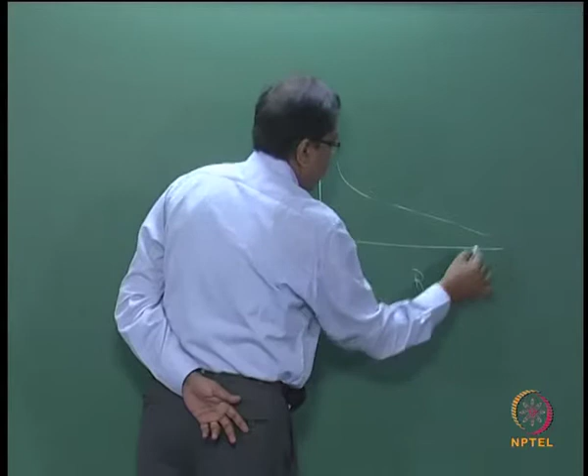Now you have already seen how the coefficient of drag varies with Reynolds number, the CD curve something like this. At low Reynolds number there is a significant decrease in the coefficient of drag, and after a certain value of Reynolds number the CD is more or less constant, the variation is not significant. Keep this in mind and try to understand the effect of turbulence.

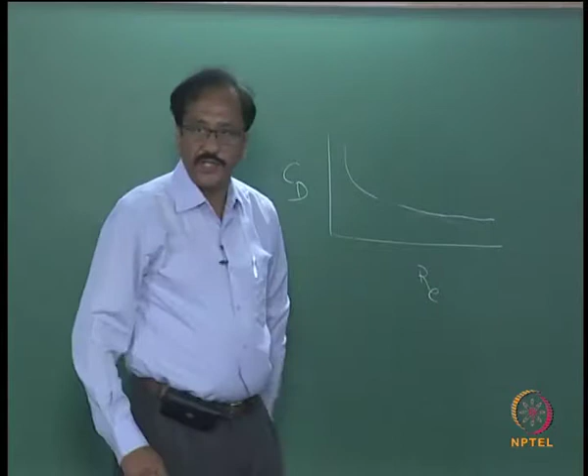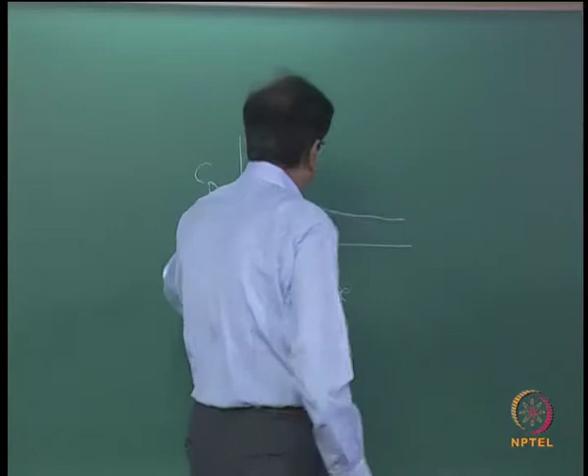The drag exerted by fluid on a body in a stream is directly proportional to the relative velocity at very small Reynolds number, where you have the variation of the coefficient of drag. So one classification is where there is a variation of CD, and the other is where there is not much variation of CD. In the first classification, the random fluctuations in the velocity will not have much effect on the mean drag, which will remain proportional to the mean velocity. After all, it is the velocity which controls.

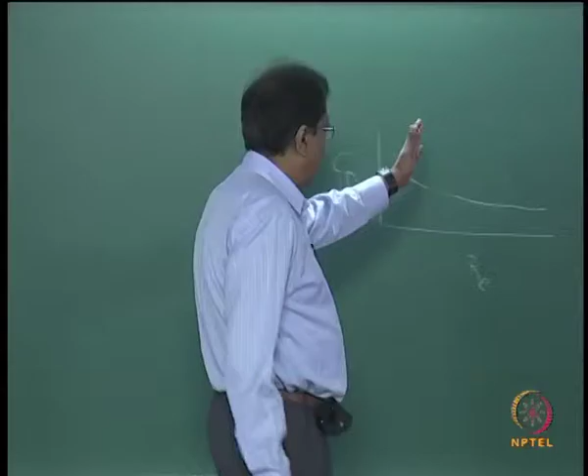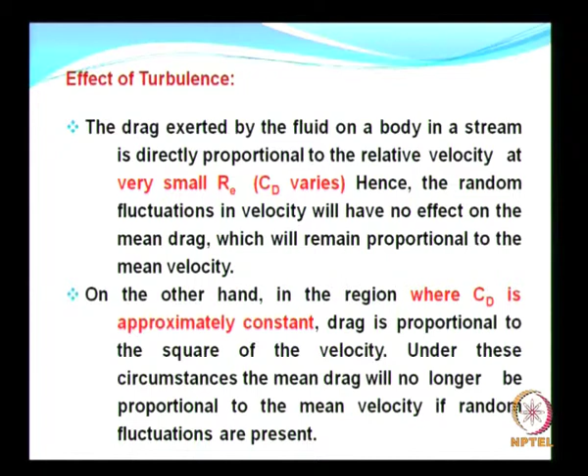On the other hand, in the region where the CD is more or less uniform, particularly at larger Reynolds number, drag is proportional to the square of the velocity of the flow. Under such circumstances the mean drag will no longer be proportional to the mean velocity if random fluctuations are present. This is more important when you consider the practical application.

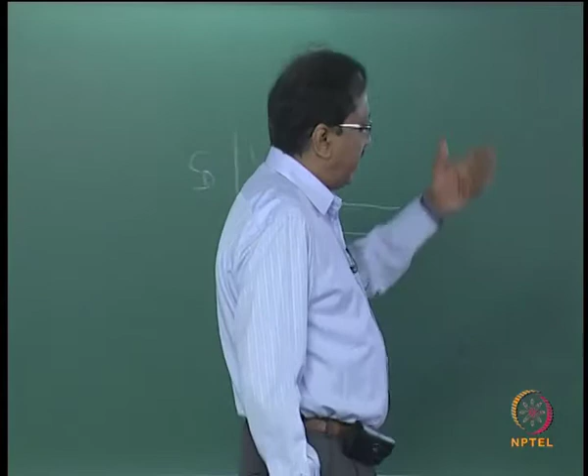I told you already, this effect of turbulence is quite difficult to work with. It is not so easy to work with turbulence, although there is some research work in progress in some of the leading laboratories trying to understand the effect of turbulence.

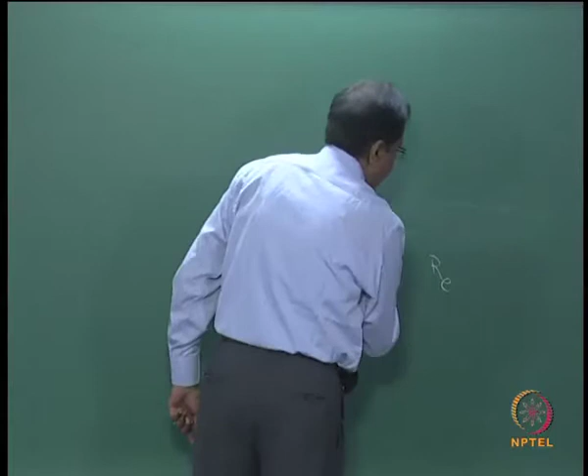Now we move on to another important aspect, which is permeability. How permeable is this medium? Is this medium permeable? No. So if you pour some water, it stands there, it does not penetrate.

So this is defined as the state or quality of a material, or it may be a membrane; both have direct application in coastal engineering. In fact, membranes have a wider application recently. This is a recent innovation we could say, that at least for the last decade they are using these membranes for coastal protection.

What does it do? The membrane causes it to allow liquids, we are not interested right now in gases, to pass through it. If we want to keep things dry, normally you wrap it with a material with no permeability or very less permeability. So all of us know, even non civil engineers must have been exposed to what is meant by permeability. But where does it find its application?

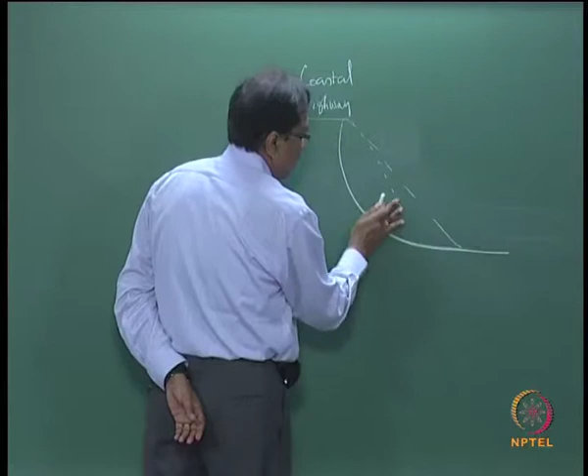For example, when you look at several structures in the coastal zone, even your highways, bridges, or revetments for that matter - suppose I want to protect an area which is getting eroded. This is maybe a coastal highway, and the whole thing initially had a beach slope something like this, and slowly as time progressed, you see that erosion has taken place.

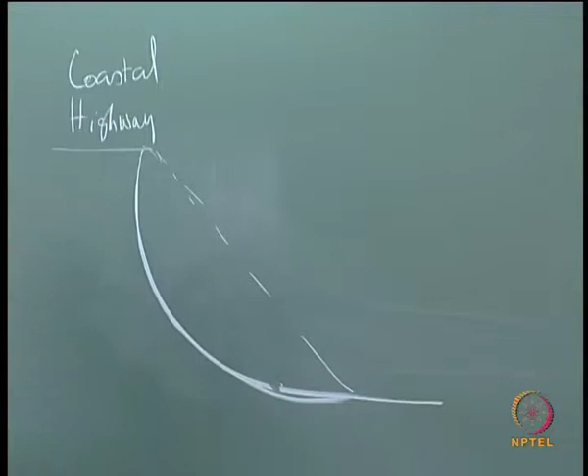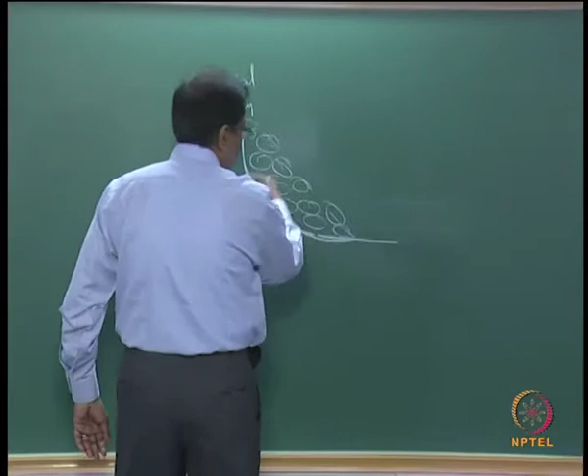So the usual thing is, how do you protect this? The simplest way is to dump stones. What will happen if you dump stones? If you dump too big stones, there will still be some amount of water escaping through, and that might create some problems. So you have to be careful while using the stones.

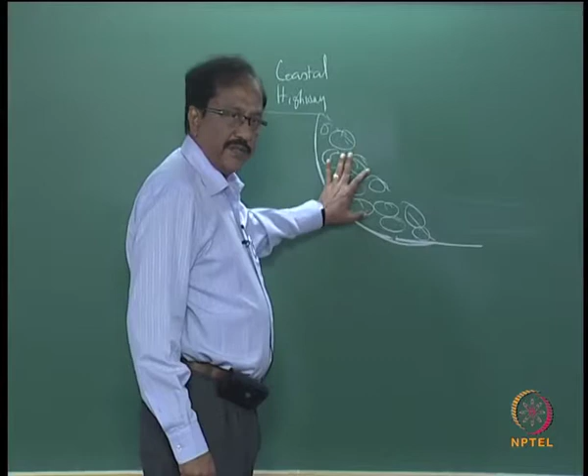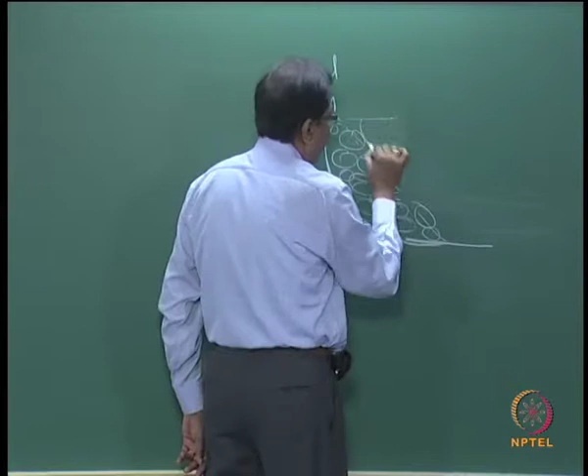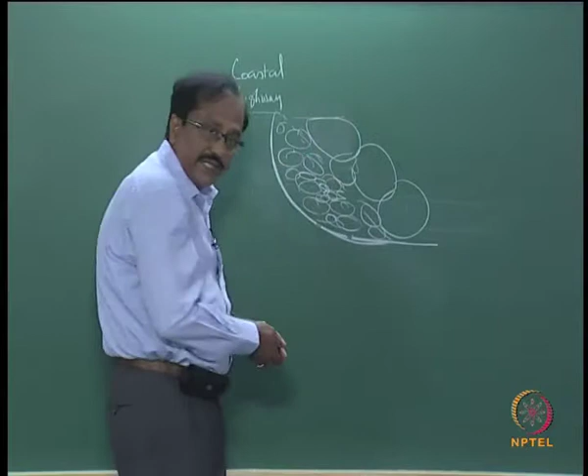Normally in this case what they do is use smaller stones, and then bigger stones, so that the bigger stones will resist the forces due to the waves, and after resisting, the flow will take place through the medium of smaller stones. So the flow gets slowly dissipated. Is that clear?

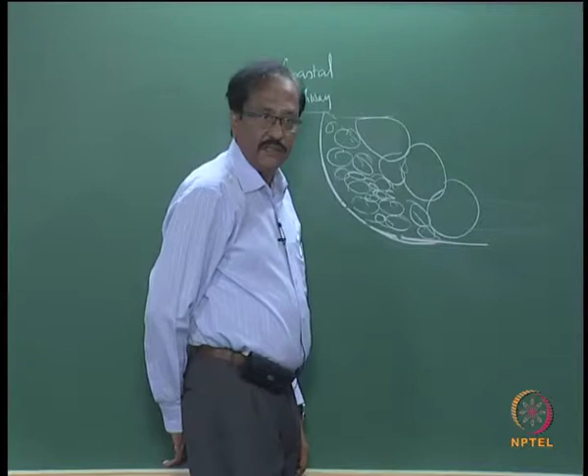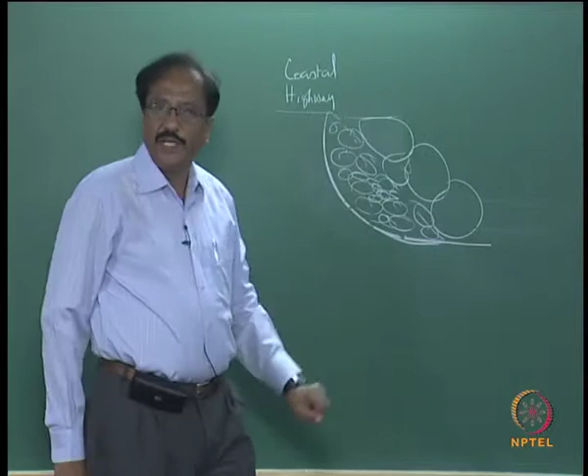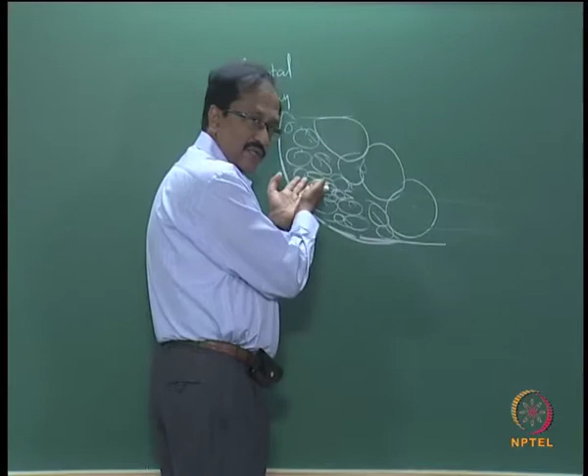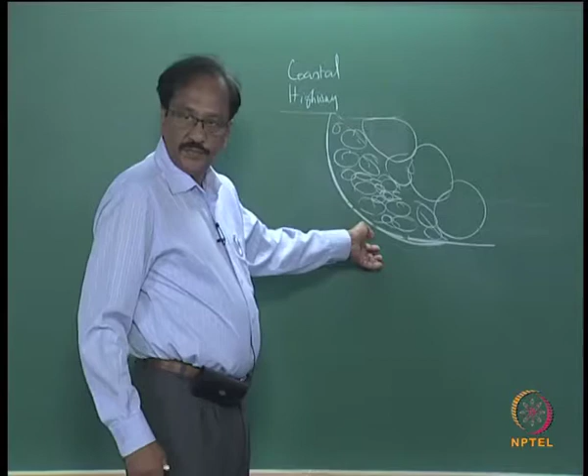So that is the reason we have larger size stones, then smaller size stones, and then a filter layer. The concept, again, is only to reduce the flow through the medium, so that this part is protected. That is how you consider the porosity or permeability, which we will be seeing again later.

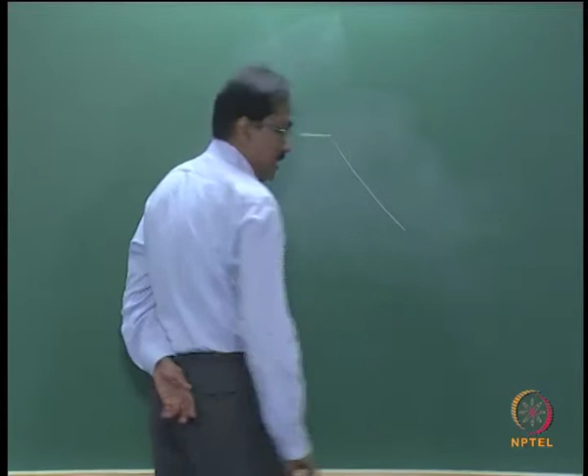Now next comes your membrane. What exactly is this membrane? One typical example is when you have an area which needs to be protected, a beach for example. The beach is undergoing progressive erosion. How can we protect this? We use what is meant by geosynthetic material.

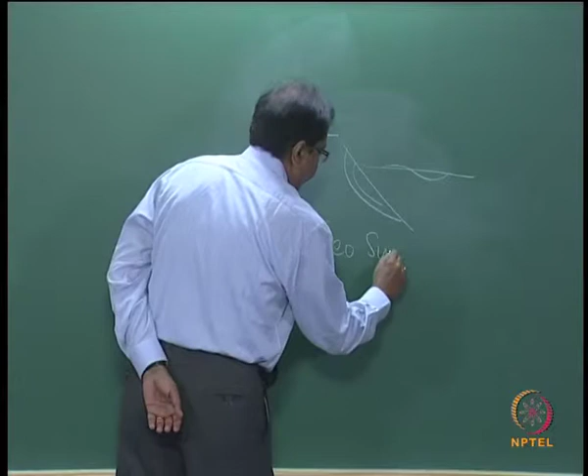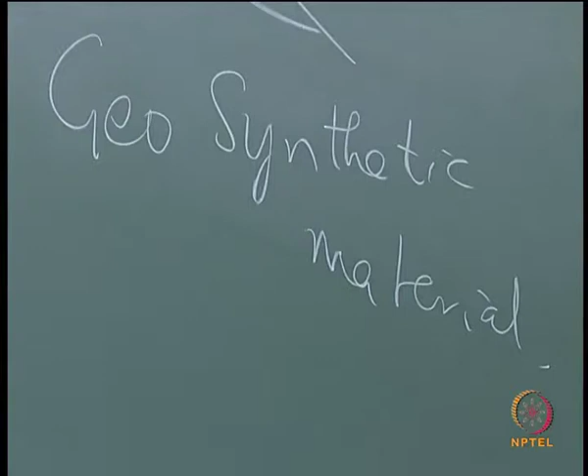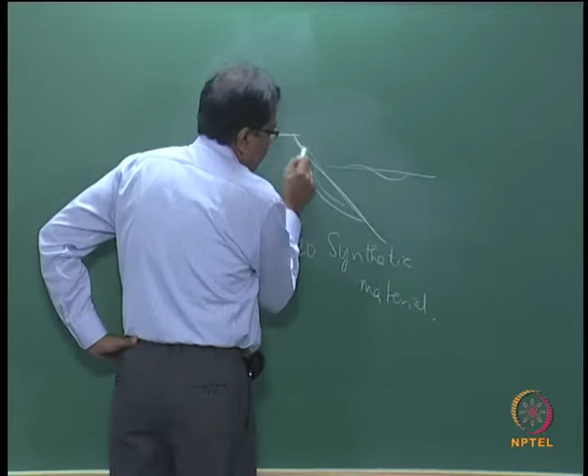This geosynthetic material, the purpose of it is to allow the water to penetrate but retain the sand or other materials. So what you can do is have the geosynthetic material here, wrap it, and then over it you can have the stones or protection layer. Of course you need a smaller size stones called a filter layer, and then over that you can have smaller stones.

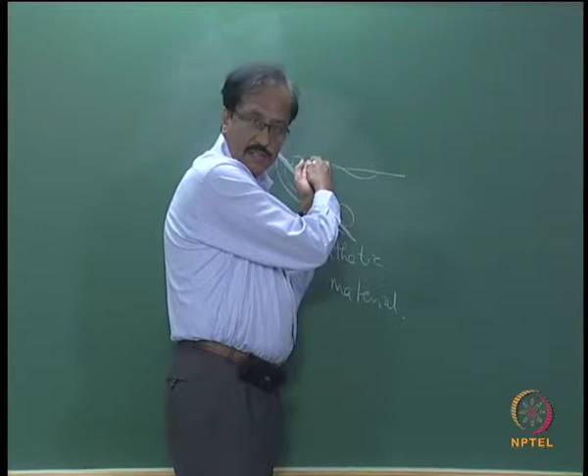What it will do is when it brings some amount of sand to this area, the sand will be retained on the seaside and it will allow only the water through.

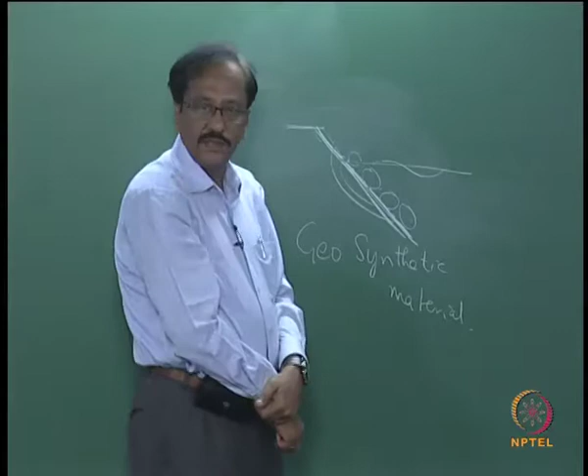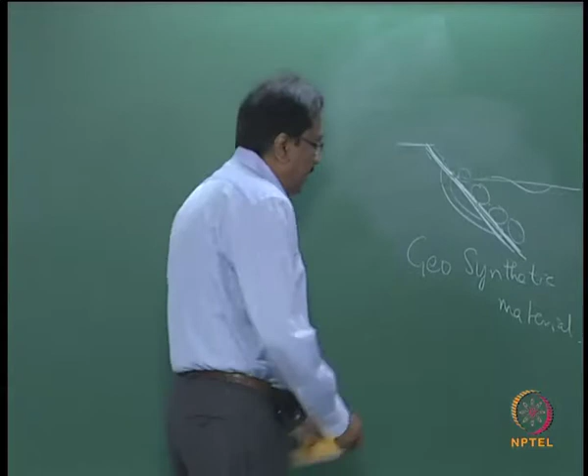There are varieties of geosynthetic materials available. The only problem is it is more favorable in non-tropical countries, because it is under discussion whether it can be widely adopted for tropical countries. Because when synthetic material is exposed to alternate sunlight and becomes wet and dry, it becomes brittle after a few years. Once it becomes brittle, it breaks, so its effect is lost. That is the reason people are still discussing whether geosynthetic material can be adopted.

We will be having a few lectures on geosynthetics later. So you see that permeability of a material as well as the membrane has significant effect in the design of coastal structures, and also when you talk about breakwaters, which we will look at the design and classification of later.

Now coming to permeability, there are different ways of expressing it. I have chosen this - the Darcy, which is referenced to a mixture of unit systems. A medium with a permeability of 1 Darcy permits a flow of 1 centimeter cube per second of a fluid with viscosity 1 millipascal second under a pressure gradient of 1 atmosphere per centimeter.

So what are the parameters you have? You have the rate of flow, the property of the fluid, that is the viscosity, and how does this fluid flow take place? This fluid flow takes place because of the existence of a certain pressure gradient. And how far does it have to flow? It has to flow through a certain area. So you have the area, the rate of flow induced by existence of a pressure gradient, and this is done by a fluid with a certain viscosity.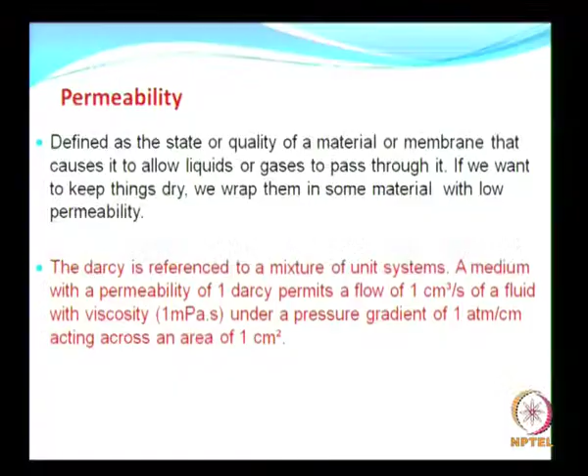So this is how permeability is defined, but if you want more information you can read a number of books available.

Now the most widely used formula for permeability, this is after Fair and Hatch, which is widely used even today, gives capital K into G. Capital K is the specific permeability, governed by this expression, wherein A is the packing factor equal to about 5, and capital B is a sand's shape factor varying from about 6 for spherical grains to 7.7 for angular grains. We normally take an average also.

And what is the other parameter? G is the gravitational constant. Now capital P is the percentage of sand held between two adjacent sieves, and DGM is your

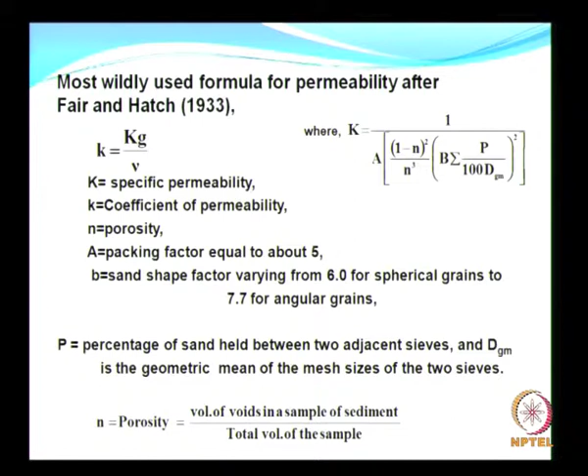Now we have more or less done with the basic properties of soil that are of direct relevance to coastal engineering. One important aspect is the liquefaction of sands. Liquefaction of sand is what? How important is liquefaction of sand? It is extremely important, because if you are going to construct a building in a location where you can anticipate liquefaction, the entire thing is going to collapse.

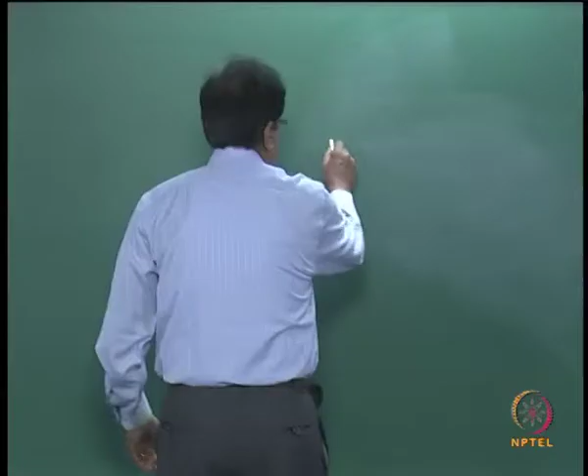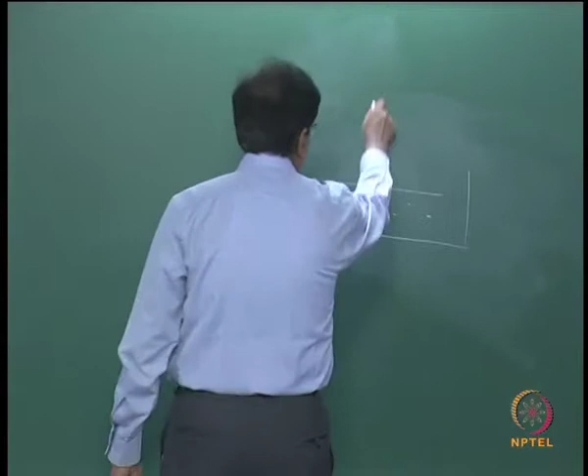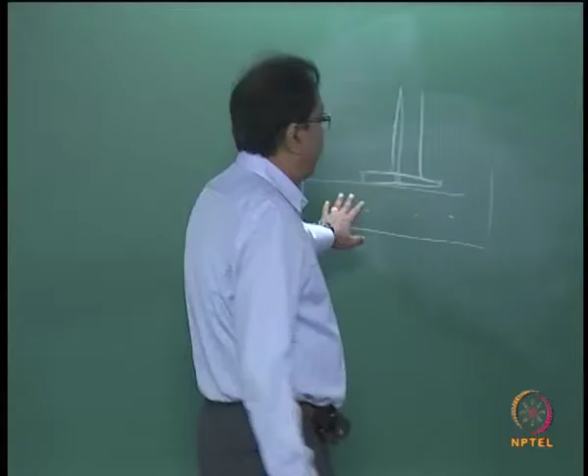So when saturated sand is subjected to loading without drainage, so I have a container with sand, saturated sand, and this is subjected to loading. I have the load. Now there will be pressure exerted in the pores. What will happen when the saturated sand is subjected to loading without any drainage, because it is now a confined container? The pressure in the pore fluid may, under certain circumstances, approach or equal the total stress.

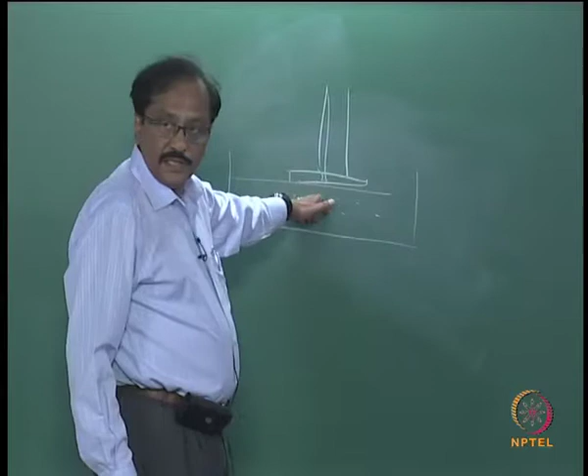What is total stress? Load by area. So the pressure may equal the stress. The total stress, that is sigma minus the pore pressure, is expressed or defined as effective stress. Under such a circumstance, when the pore pressure is equal to the total stress, then the effective stress must approach 0.

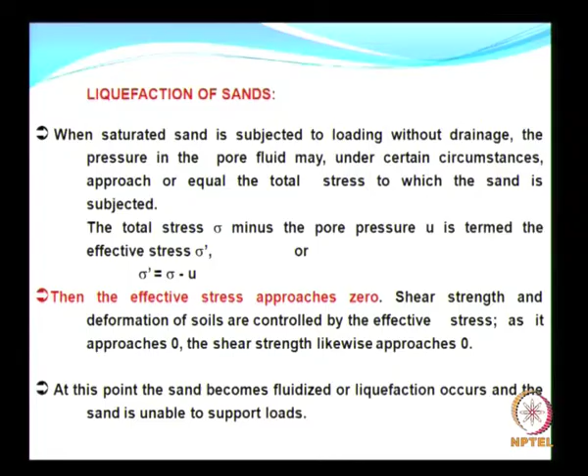The shear strength and the deformation of soil are controlled by the effective stress. As effective stress approaches 0, the shear strength also becomes 0. What will happen? Can it withstand any structure? So we should make sure that liquefaction should not occur. At this point, what happens? The sand becomes fluidized, something like a fluid. When it becomes a fluid, or when liquefaction occurs, the sand is unable to support any loads, and that will lead to total catastrophe.

I suggest some of you read extra books. A list of references is given at the end of my lecture material, where apart from those you can find other standard references for details of liquefaction of sand, the physical phenomena, in much more detail. I suggest those books for additional reading.

So I will continue with the liquefaction of sand. Under continuous monotonic loading, sands will liquefy if the state of denseness is below a certain value. This occurs because loose sands during shear tend to decrease in volume, but if drainage is prevented, the volume must remain constant. So in such a case, what will happen?

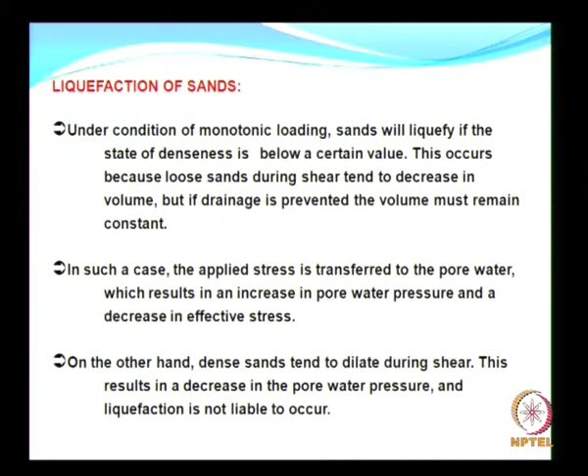The applied stress is now transferred to pore water. When the applied stress is transferred to the pore water, what will happen? This will result in an increase in pore water pressure and a decrease in the effective stress. So you do not want an increase in pore water pressure, am I right? On the other hand, dense sands will dilate during shear, and this would result in a decrease in the pore water pressure, and liquefaction is not liable to occur.

So the quality of sand, the characteristics of sand, is extremely important. There have been a number of studies to understand the variation of pore water pressures in case of rubble mound structures. What do you mean by rubble mound structure? We will be seeing about rubble mound structures in detail later.

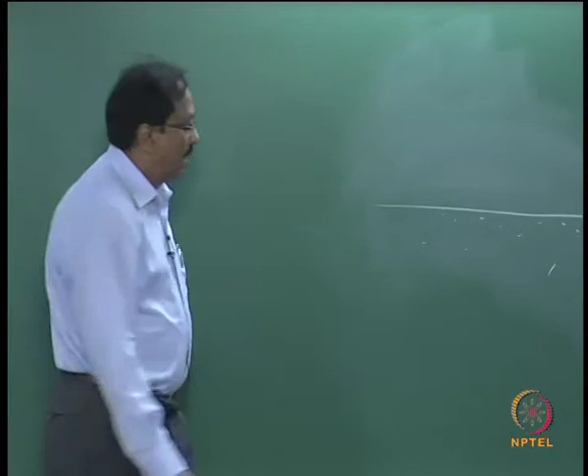Now the kind of studies would be something like this. So you have some characteristics of sand, and then you usually have a structure which is called a breakwater. Again I have already emphasized the need for having variation in the permeability of the structure.

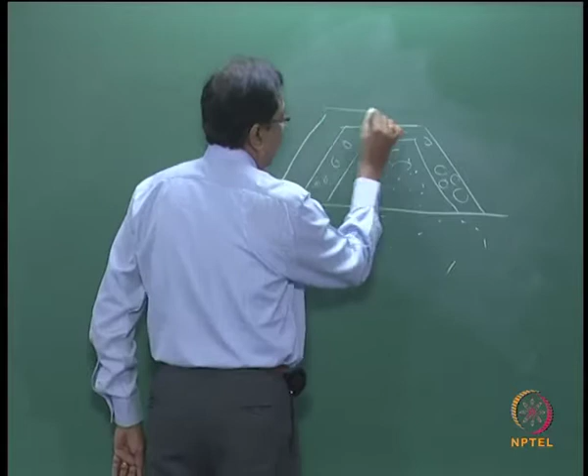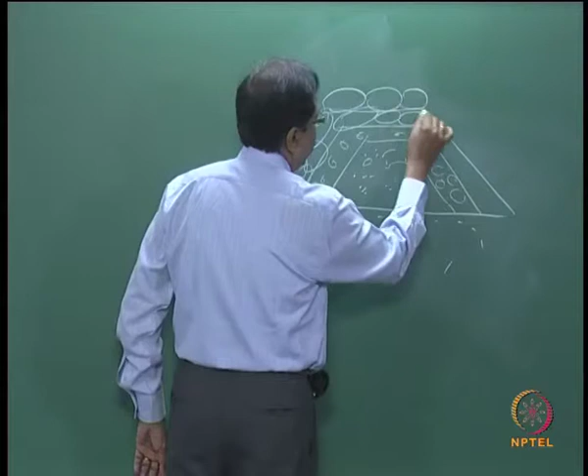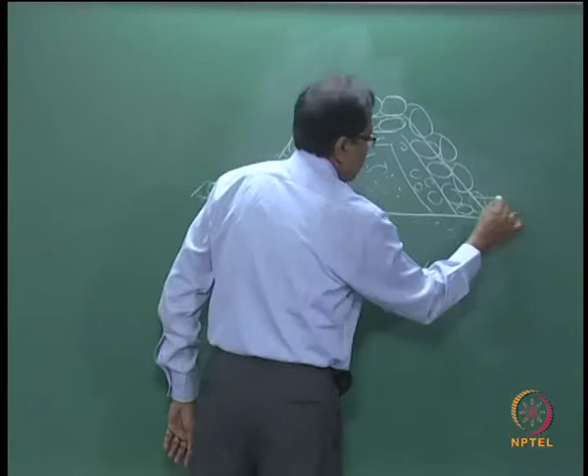So you see that you have bigger stones on the top. I will emphasize about all this design etc. later. Now for this, what is the usual kind of studies in relation to pore water pressures?

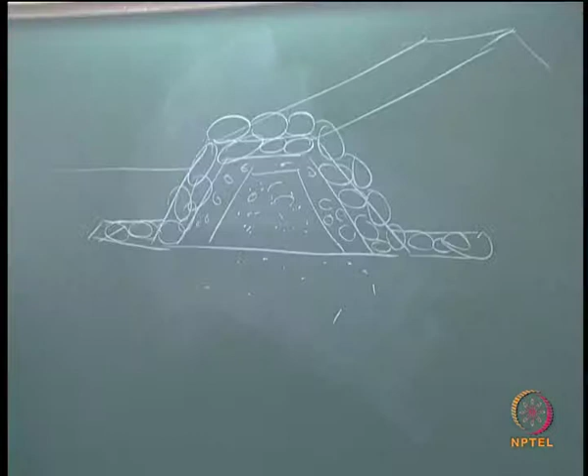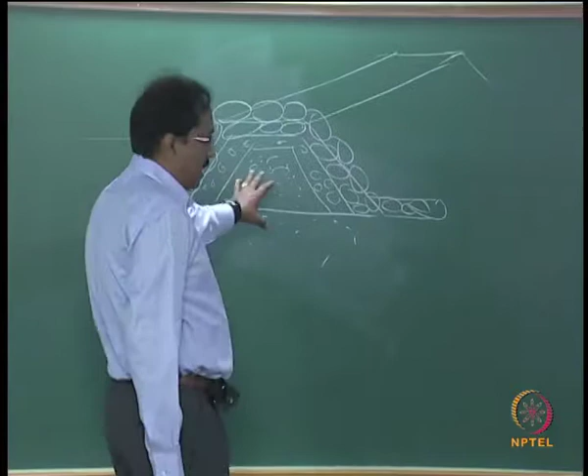Most of the studies are, so this will be extending like this. You see this is a structure which is called a breakwater, constructed for creation of artificial harbors. Before you really construct all these things, you should understand about the pore water pressures, whether there is excess pore water pressures being built up etc.

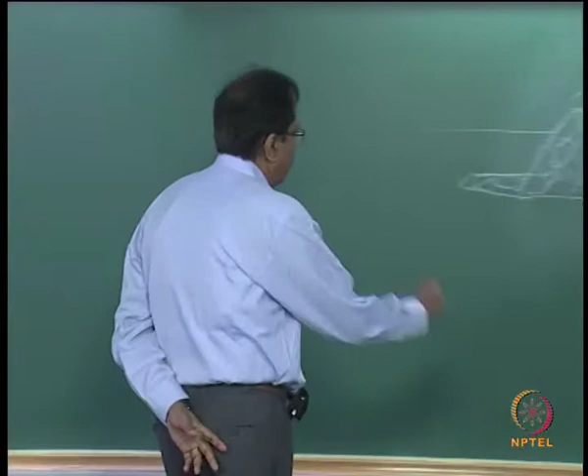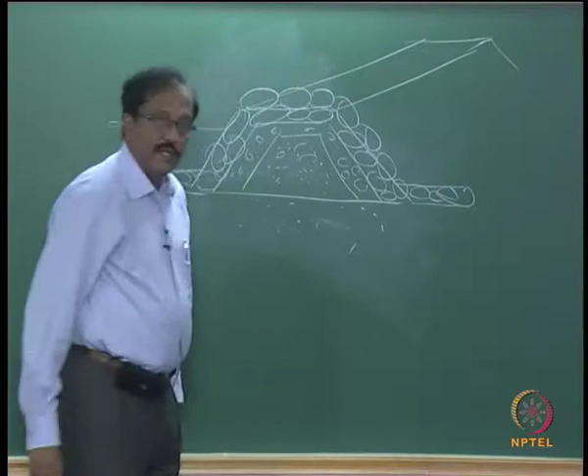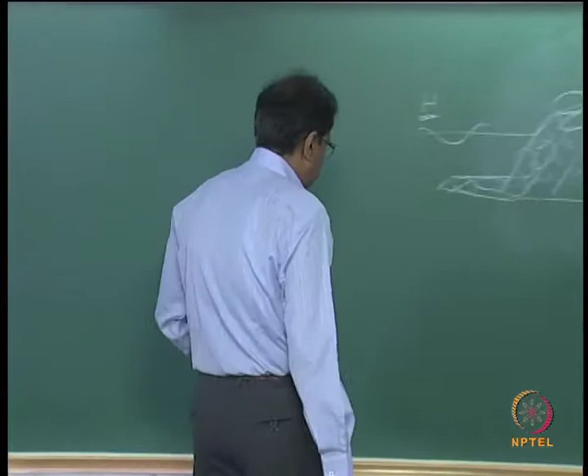So you people have measured the pressures inside this medium as well as in the seabed, and these pore water pressures naturally have to be related to the characteristics of the waves, the characteristics of the structure as well as the soil. This is one area which people are still working on, trying to establish relationships on the variation of pore water pressures as a function of the incident wave characteristics as well as the characteristics of the structure.

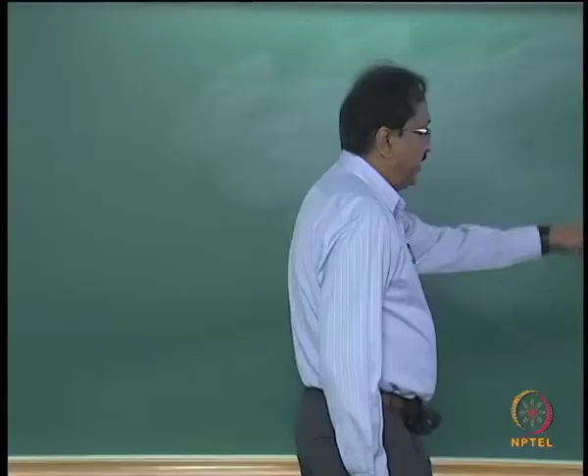So as we have seen, if you do not want to have your liquefaction, make sure that the pore water pressure is minimum, okay.

Although it is quite easy in the laboratory to produce a condition of zero drainage, yes of course it is very easy to create a condition of zero drainage, because if you have a tank, there is no water which is released, right.

Which allows the buildup of pore water pressures in loose sands. Sands will usually drain quite readily in the field, understood. So you have to be careful while you are doing some such studies in the laboratory also. If you are trying to do some test similar to something to do with liquefaction, you have to make sure about the boundary conditions.

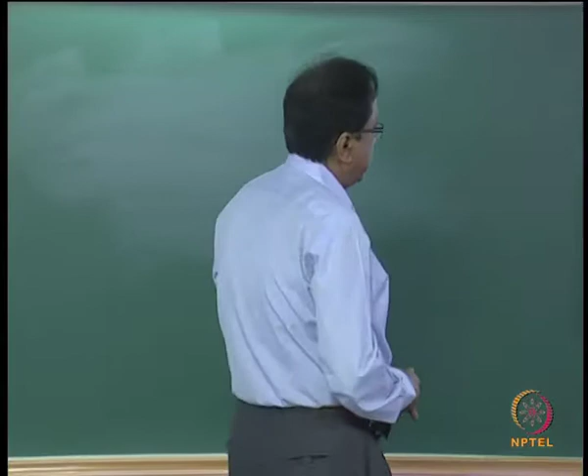Two conditions under which this is not true: when a sand body is encapsulated by pervious soils, and when the external stress is applied so rapidly that it would result in excess pore water pressures, such that the resulting pressures will not have an opportunity to dissipate the load that is being applied.

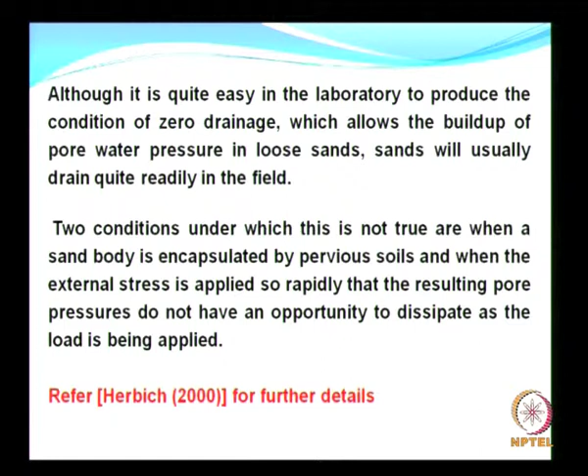This is what I have been explaining with the help of some of the figures, and now if you want to have much more information on this, I suggest you read the reference, the book written by Herbich. It's an excellent book giving all the details about whatever I have discussed.

Now when I said about the dissipation rate, when I talked about the structure having larger stones, then followed by smaller stones, and then again by the smallest stones, that is progressive decrease in the permeability. The reason I said this is gradual dissipation, and gradual dissipation is always good.

So the dissipation rate is a function of sand's permeability, which is also a function of the state of denseness of sand and the length of the drainage path.

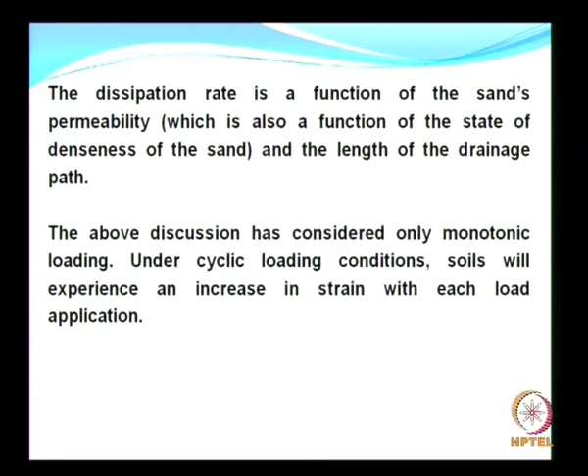So the above discussion has clearly considered only monotonic loading. But in the case of coastal engineering, we talk about cyclic loading. Under cyclic loading, the soils will experience an increase in strain with each load application, because it is cyclic, so the strain will keep on increasing under every wave. In fact, when you want to test, you should test with a number of waves in order to understand the physics behind all these phenomena.

I would like to continue that earthquakes are an important cyclic loading mechanism. Earthquakes produce a number of shear stress reversals in such a short period of time that drainage may not occur even with rather permeable sands, and liquefaction can result.

So, one is we are talking about the permeability of the sand. So even if it is permeable, you can have liquefaction occur.

Now, cyclic stresses produced by waves can also induce pore pressures in marine sediments, which is a well established fact, due to the action of ocean waves. So the loading will be cyclic, and this will induce pore pressures in the marine sediments.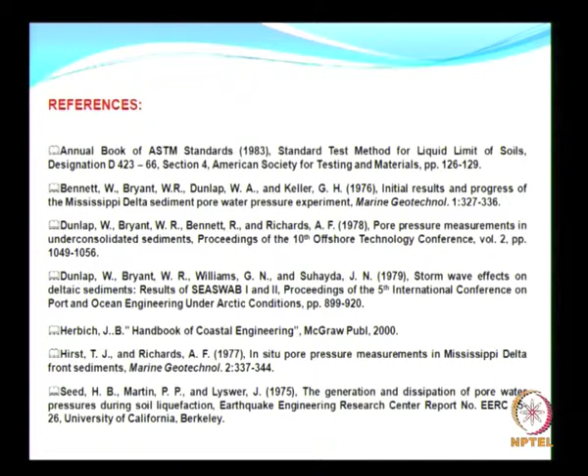And I have also given one or two publications on the results from pore water measurements etc. Maybe it is a bit old, but you can still have some ideas. This is only to give you an idea about the nature of studies that could be carried out under the pore water pressures etc.

So, any questions? With this we finish the sediment characteristics, and then we will go into the initiation of sediment motion or the wave deformation etc. from next class. Okay.